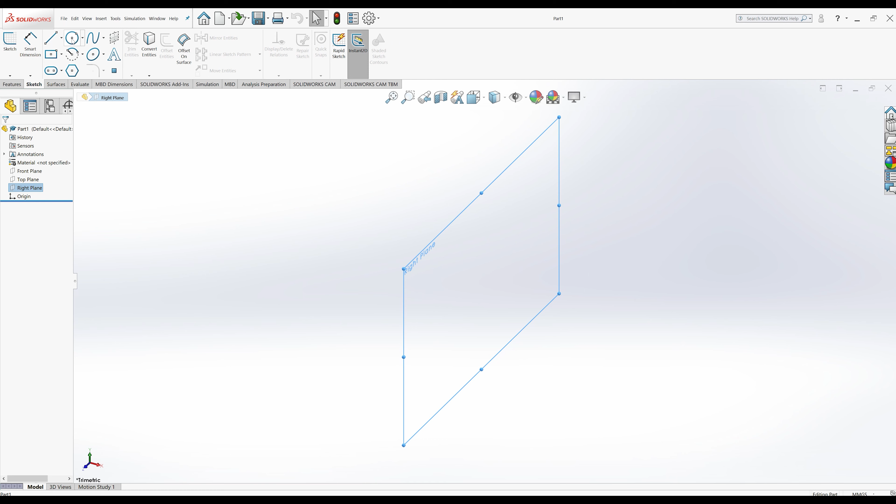You'll need to open up a new part and go to the right plane, and we're going to start sketching on that plane. We're going to start with the ellipse tool. To add the ellipse, we add it to the middle and then drag it out, click once and then click again to change the size of the ellipse. Then we use our smart dimension to add some dimensions to this.

We need to know the size of the shape. Just for illustration purposes, I'm going to make this 30, and then across I'll make that 106. It's nice to use round numbers if we can, and because we're just doing this as an illustration, we can do that.

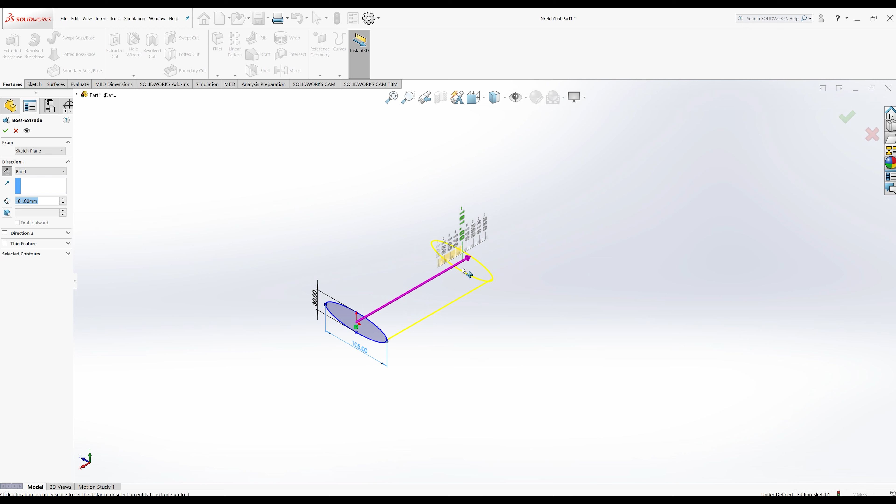Then we go to features and extruded boss. If you want to quickly change the views of how you're looking at something, you can press the space bar, which gives you lots of options on changing the camera angles. It's a nice quick way of doing it. So I've extruded that - it doesn't matter too much what size you extrude it to, but you just need to extrude it backwards. We can always change that later on.

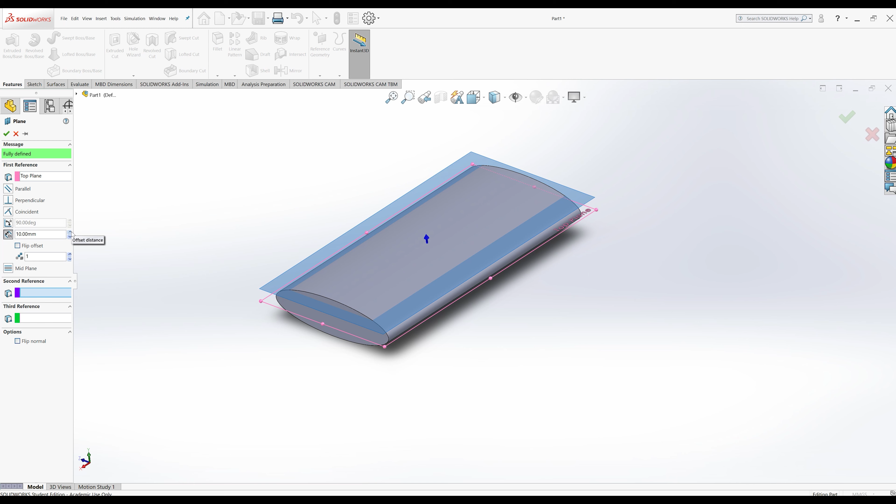Then we go to the top plane and reference geometry, and we're going to add a new plane above the surface, and we're going to use that to cut down into the remote to add the buttons.

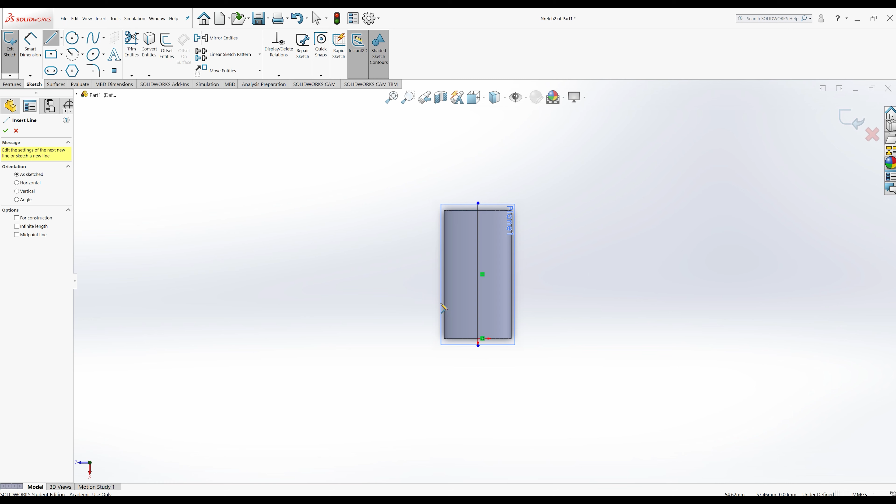Now what we'll do is add a few reference points. Those reference points are really useful because they allow us to add buttons in corresponding spots, and because we can use the dimension tool, it means we'll be able to add them in the right places that we're happy with. So I've got the center line, and then I've done another line about a quarter of the way across the remote, and then I draw a circle just in the middle of that - that's the kind of top navigation buttons you'd normally find on a smart remote.

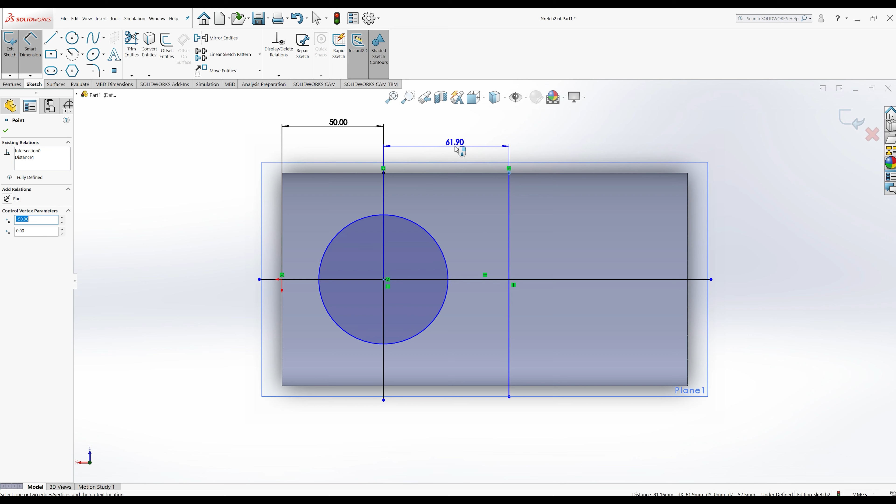Then another reference point a bit further down to add the next buttons. Then select the two points that we want the distance to be between, set that to 50, and then select another point and the centre of the circle so I can choose how far away they are. Do that about 70 to give a bit of space between the buttons.

Then I'm going to add a circle along that point, and because we've got a line down the middle, we can use that as our reference. If I pull that to the left, you can see I can choose how far away it is from that line.

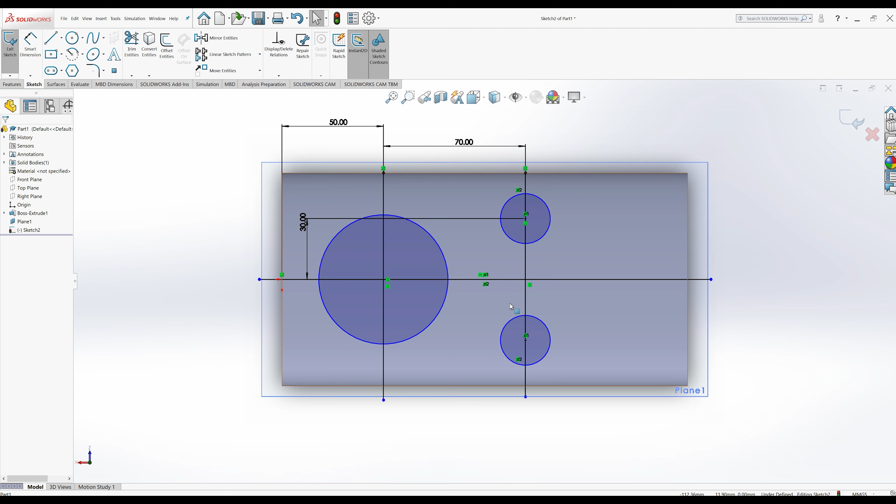Then what we can do is mirror - because we've got a center line, we select the circle and then select the center line, and it will mirror it for us so it's in the exact same position. It's nice and quick, much easier than redrawing it, so it's an efficient way of doing it.

Then we go to features, do the cut extrude, and select the contours around the edge. Once you select them, you don't want it to go all the way through the product, because then you'll just end up with a hole the way through.

You want it to go through so that it just goes onto the surface, not too far through there. As you can see with the yellow parts, you can see how far into the product they're going.

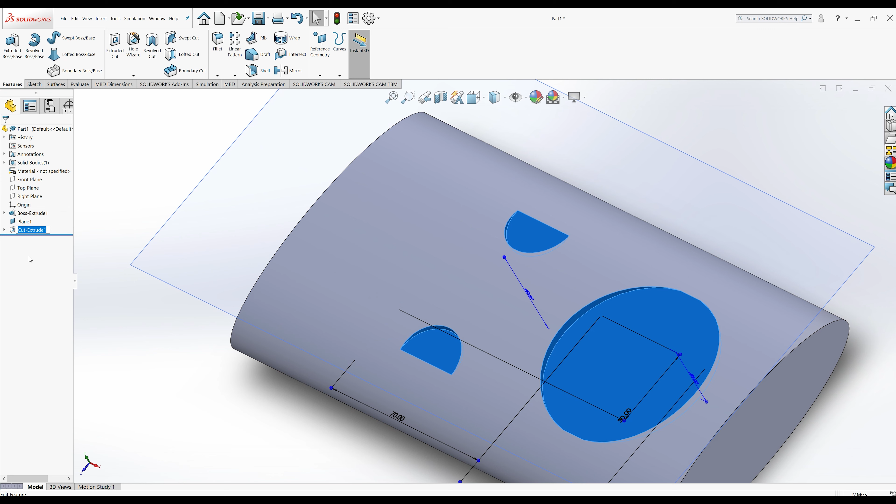When we green tick, you can see that the second remote buttons haven't gone all the way through, so we can just right click and do edit feature, and pull that down a little bit further. You want to make sure it cuts complete circles into the shape, otherwise it's going to make the next step a little bit more difficult.

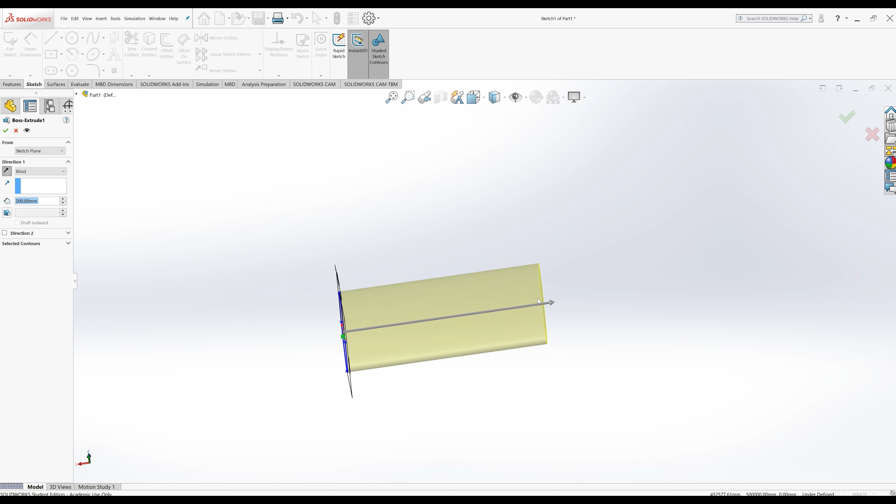And then we have the basic part there, and you can right click on that plane and hide it by clicking on the eye, which just hides it from view to make things easier. Then, not quite happy with the sizing of that extrude, so just make it a little bit bigger. Like I said, you can always change this as we go. Green tick just so we're happy with that.

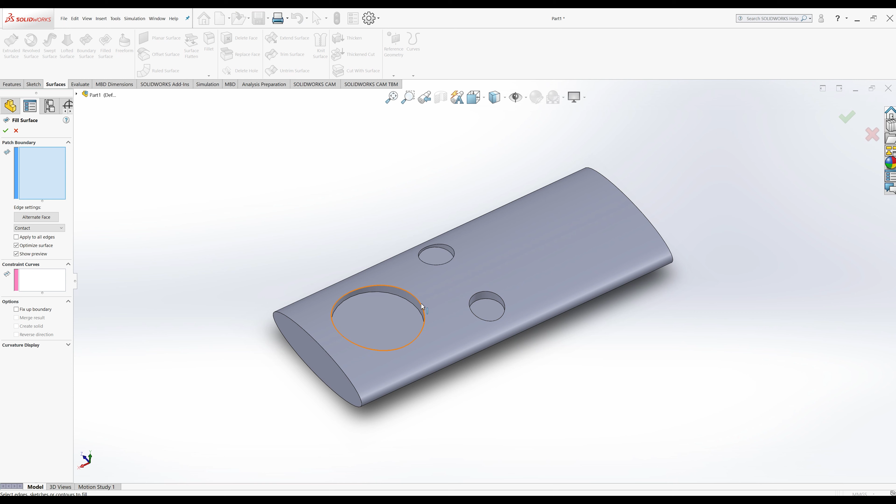The next thing we're going to do is use surfaces. If you haven't got surfaces on, right click on the tab and make sure surfaces are ticked. Then we want to go to filled surface. Filled surface basically fills a surface around a certain boundary. So if we select the circle, it takes a few seconds to load, and you can see it's got that yellow tinge, which shows where it's going to fill in the shape. It's a very quick, easy way to fill in these circles.

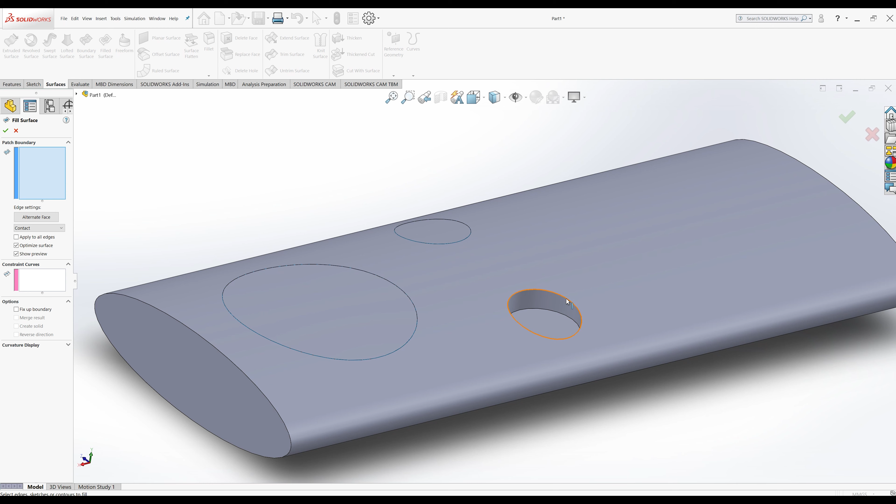So again, click the circle and then green tick. Now it's not a great idea to try and do more than one at a time, so what I'd recommend is doing one at a time. Otherwise it tries to fill the two surfaces together, so do one at a time and then green tick, and green tick again. So then we've got the next stage complete, and you can see it's filling in where those buttons are.

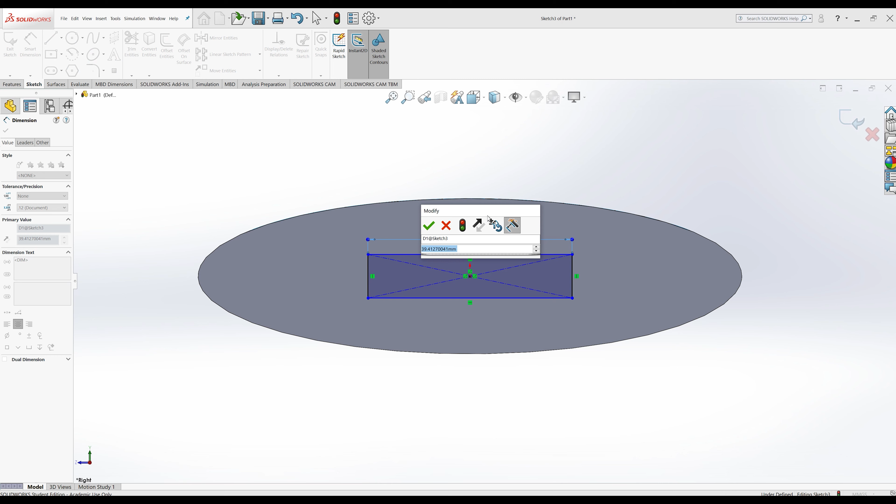Then just go to the front and sketch on the front. We're just going to add a rectangle shape. This is for the infrared reader that would normally interact with your devices, so we'll add that on there, and do the same again with an extrude cut. So just choosing the dimensions we want to use, then set that to 35 and 6 just for the height.

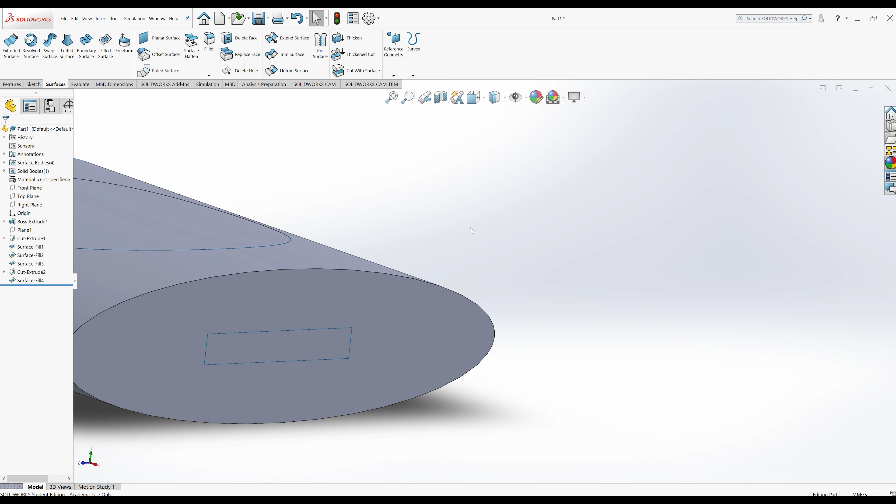Now again, like we did before, we can go into features and do the extrude cut, and change that to a very small amount, something like 1mm would be ideal. Then we can also go back to surfaces and do our filled surface. With this you'll need to select all the edges, not just one part, so go all the way around and select all the edges. Once you've done that, you see you get that yellowy tinge again to show it's being filled in.

Okay, so what we can do is we can now see that we've started getting those buttons in the right place, and we've got our infrared on the front. So far quite happy with the sizing of it all.

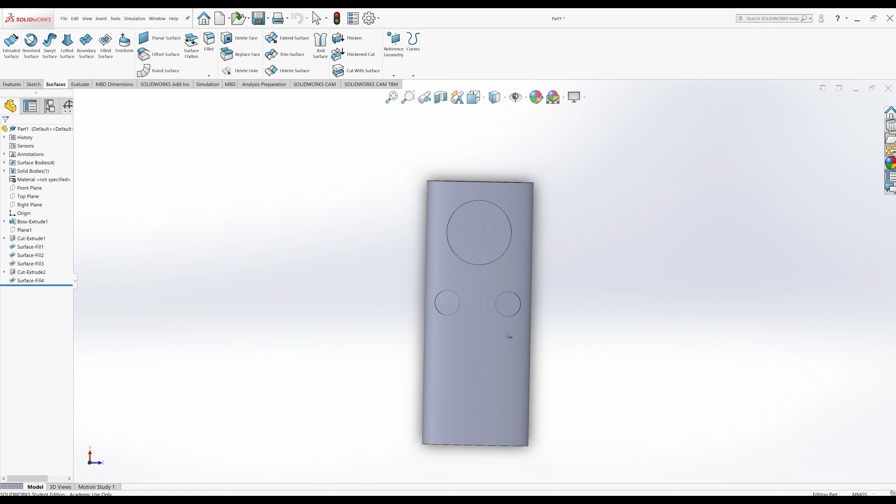So the next thing we need to do is look at making these thick, basically. So if we choose thicken and select the part we want to thicken, you can then choose whether you want it to thicken inside, outside, both, etc. And if you try to thicken it inside, you'll see an error comes up. So we need to actually change it so it thickens going outwards. It doesn't like to thicken inwards because it's just going to collide with itself.

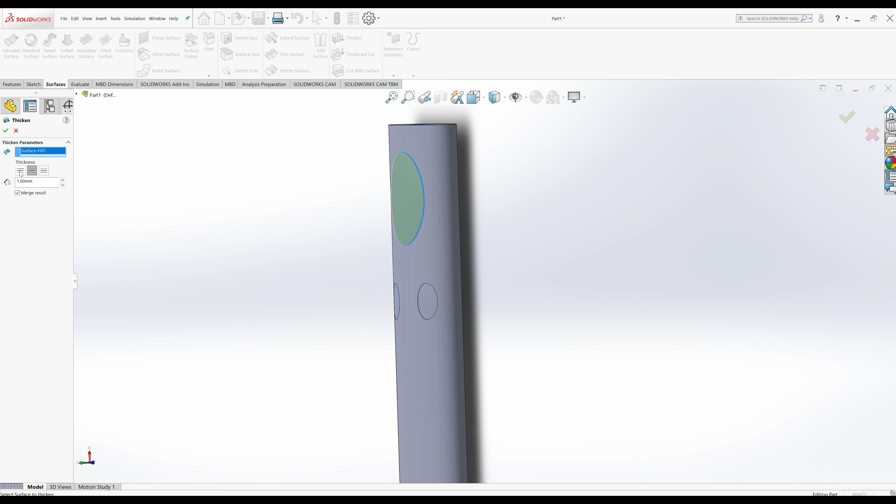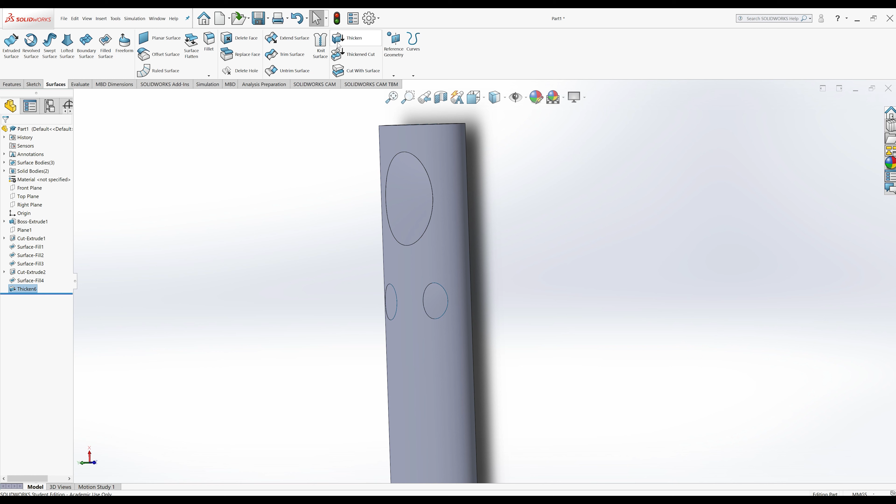So what we do is actually surface thicken, and you want to choose the far left option, and that will thicken it outwards. You'll see it gets raised ever so slightly, which gives it a more realistic look of a button anyway, which is exactly what we want. We can change that thicken to a smaller amount if we don't want to thicken quite that much, because 1mm looks quite a lot. So you can actually thicken it by 0.1, which still gives a slight raised surface but only a small amount, and then we can thicken the others as well.

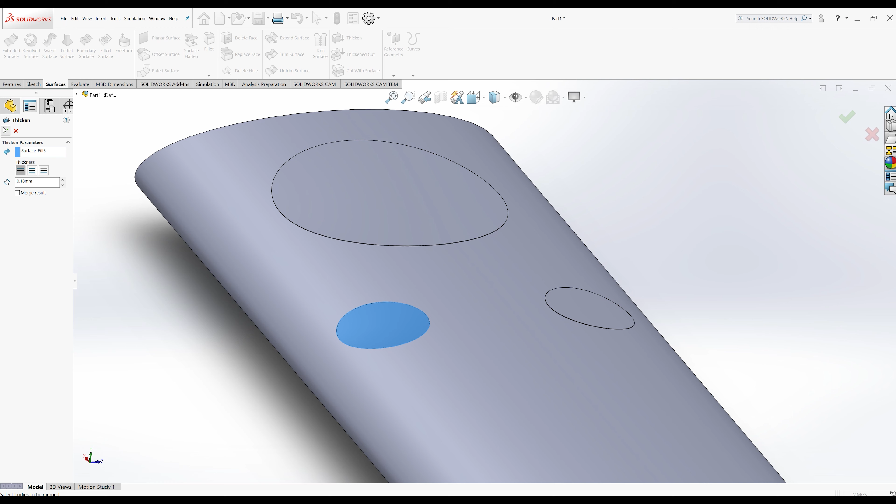Now with some of them, when you're thickening, you might get an error that comes up. Part of that is just the way it's trying to thicken it. So what we'll do is go back to our thicken, select the surface again, and then go into merge results and green tick. You can see that it won't merge the results, but it will still thicken it.

So the thicken still works and still gives us the same desired result.

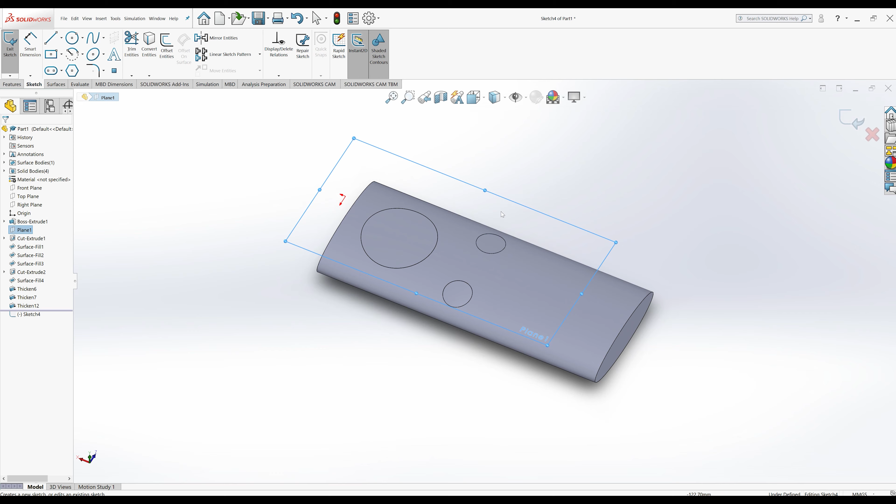Next we're going to have a look at the top view, and go back to that plane we had before, plane 1, and sketch on that one. That's the plane above our design, and this is the one we're going to start drawing on to add extra details.

We had a circle that's smaller than the original circle. Now we're going to extrude cut and fill these shapes again, so they need to be slightly smaller. Set this one to about 35, should be fine.

If we then sketch one of these lines out, you'll see these yellow lines appear, showing that it references it properly and keeps it in line. They normally lock to different angles, like 90 degrees is one of the angles it locks to. Now you can draw the lines like I'm showing here, but there's a much quicker way, and I'll show you that now.

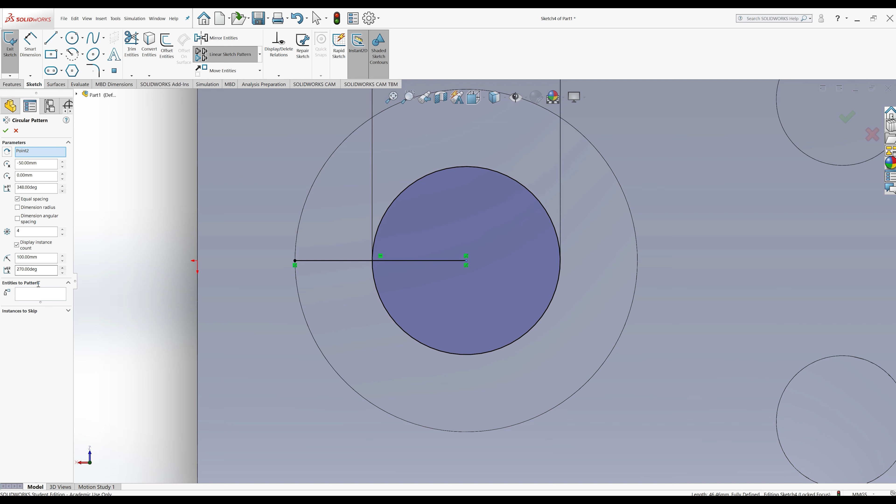The much quicker way is if you go to where it says linear sketch, drop down and do the circular one. Select the circle, go to the blue box, click in the middle, and that shows the point you want to rotate around. Set it to 4, show the pattern, click on what you want to pattern, and set it to 360. That shows you where the yellow lines are going to appear, so green tick, and you can see they've been replaced with black lines. It's quite a nice quick way of drawing those shapes out.

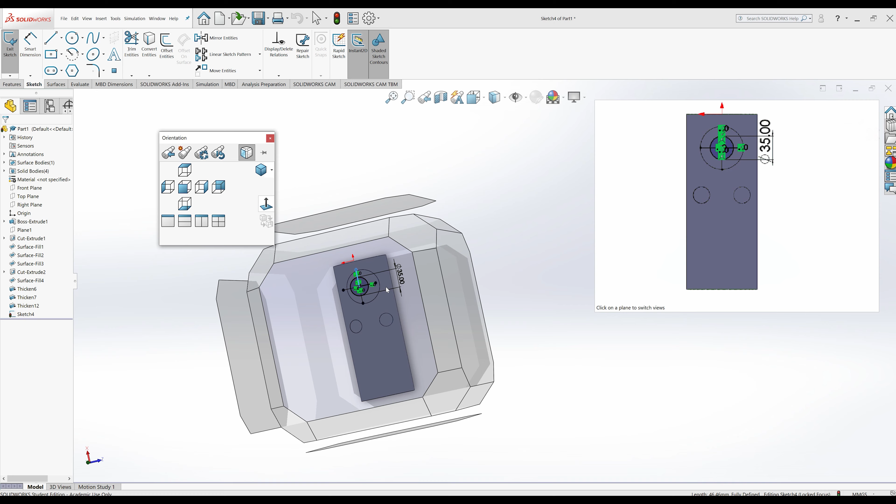We can use that to reference where we want the extra buttons to go. We're going to draw another circle on one of the black lines, and reference that by adding a dimension so we know how far away it is from the centre of the circle, so 25. Then go back to our circle pattern, circular sketch pattern, select the centre again, entities to pattern, select the circle, and green tick. You can see that again has put them all in the right place, corresponding to each other around the circle. It's a nice quick way of getting those shapes into position.

Now let's look at how we're going to add the next bits to these other buttons. We're going to add pause and play to the right button and menu to the left button.

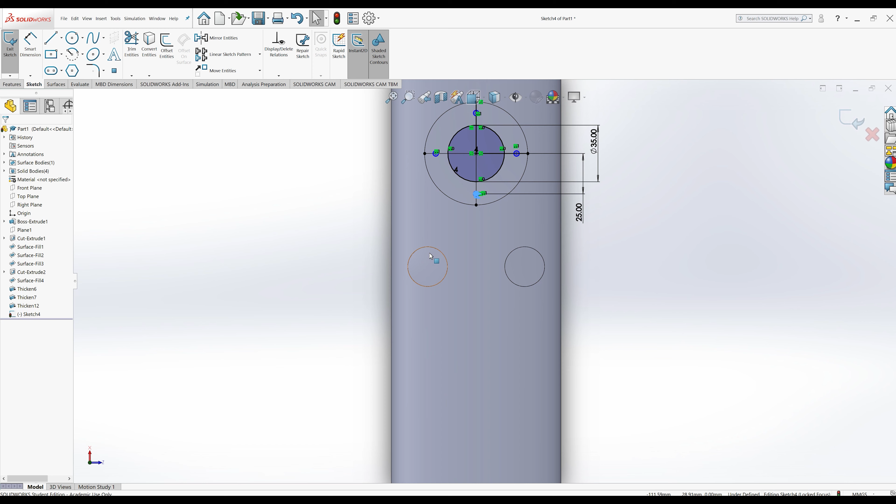So what you can do is add text - it's going to add text to your work, but it needs to follow a line of some kind. If we add a line, for example like I'm doing here, you can see that we can actually get the text to go along that line.

Now it's a good idea to make sure you're referencing everything, just to make sure you're putting it all in the right positions. If you don't put everything in the right positions, then your design won't look as nice, won't look as neat.

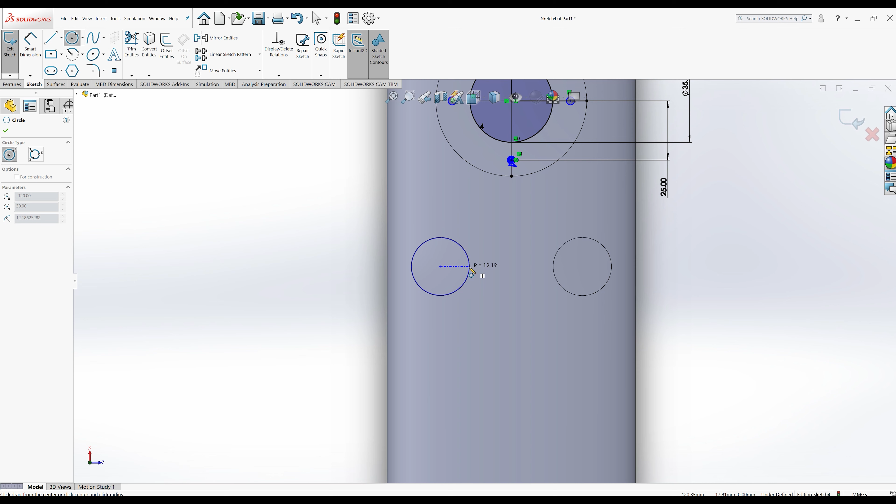So I'm going to add a reference point using the circle. If I go to the circle, it shows me the center point, and I draw a circle outwards - that's my reference point. You're kind of copying parts from what we've drawn earlier so we can control that, and set that to 25, which is the size we used for the circles.

I'm going to add a line across the middle as a nice reference point and hit escape to stop it drawing the next line. Then we can click on the A, which is the text tool. You can select the line, and when you enter your text, you'll see it appears following that line. Let's put that in the middle.

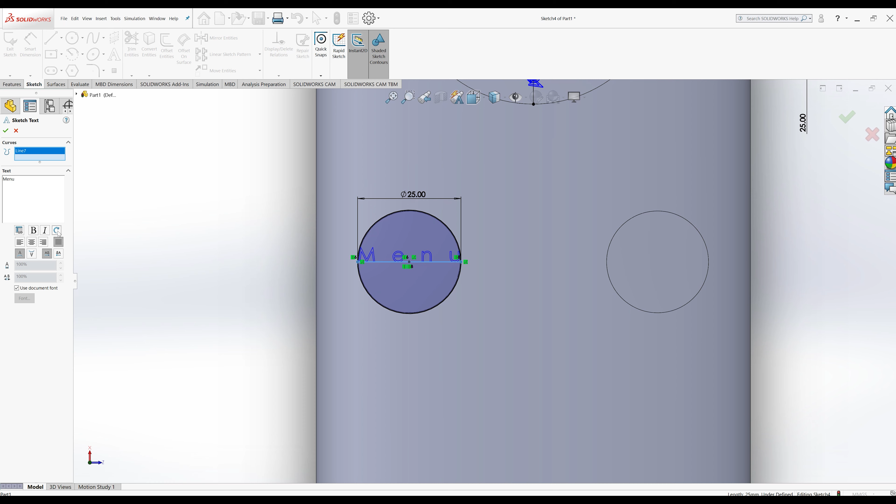You can also see that you can flip the text around, and you can also reverse it - there's lots of other options that I'm just demonstrating to show you how to do some of the different things. And then of course you can rotate it, etc. So there's lots of different options. And then green tick.

And then exit the sketch.

Now if we go to the right button, we're going to draw a circle around this one as a nice reference point again. I went to the edge of the circle to show me where the middle is, and then I can draw it out to the edge. We're trying to get these circles to the exact same size and in the same positions, and then using that reference point just to draw a line across.

Now to make sure that these buttons are going to look nice, we're going to actually mirror them. So if we draw the first one, just the top of the play button - that one's a little bit small, so I think I'll change that play button so it's going to be a little bit bigger. Just delete those two lines, make that one a little bit bigger. That's better. So again, that's just the top half of the lines, like so. Just click that one there.

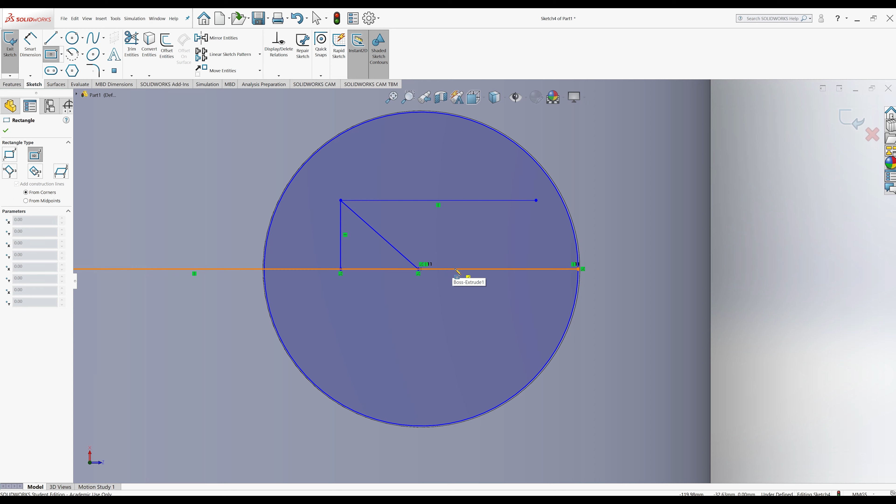And then what we'll do is add the other part, which is the pause option from the play buttons. So just choose the height of that one. I think I'll add a reference point just at the top there so that I know where the top of the shape is going to be, and that way I can make sure the rectangle meets that, just so they're in line with each other. And draw that one. Now once these are in position, we will be changing them with the dimensions tool, so just put them into place for now.

And then you can use the smart dimensions just to change the actual sizing of them. So we'll make that 2.

Now if that moves like that, just push Ctrl Z, and what you can do is right click and then fix different parts of your work, and that means that they won't move. So just right click and then click the anchor and it fixes them to place, which means that when I change the dimensions it has less areas to move, so you don't end up with it kind of jumping out the circle like mine did.

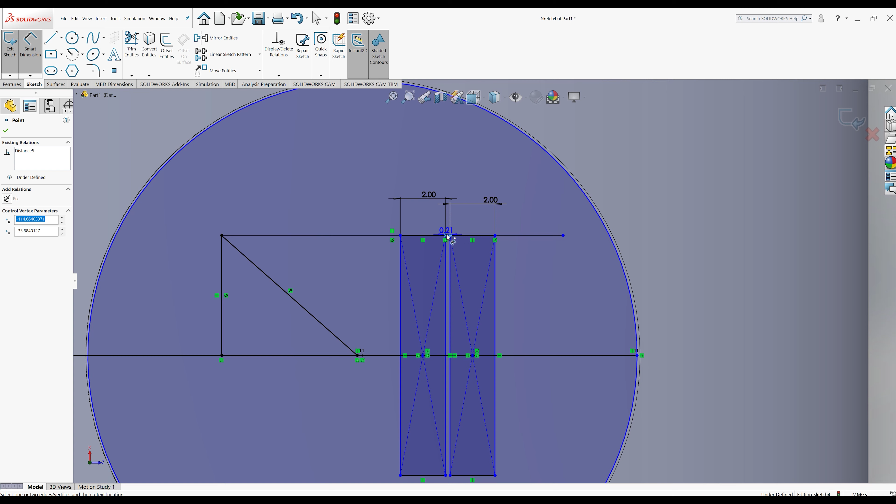And then make sure that the other one is 2 as well. And then I'll add a gap between the two parts just so we know how far apart they are, so 0.5 should be fine.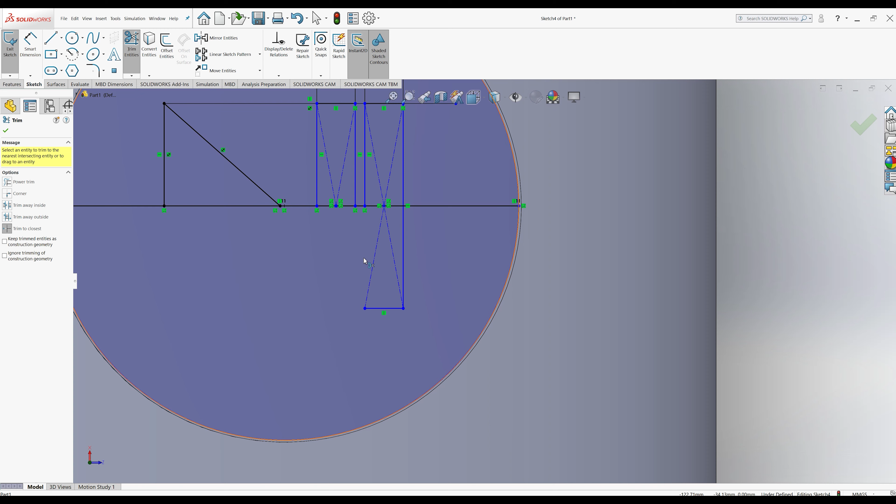And then what we can do, we can remove the bottom part of those lines. So what I'm doing is I've created them and then I'm deleting the bottom halves. You don't have to do it like this, but it's just nice to show you how to mirror the whole thing in one go. And if you go to mirror, entities to mirror, you want to select the shapes that you want to mirror first - so just clicking all the lines that we're going to mirror around.

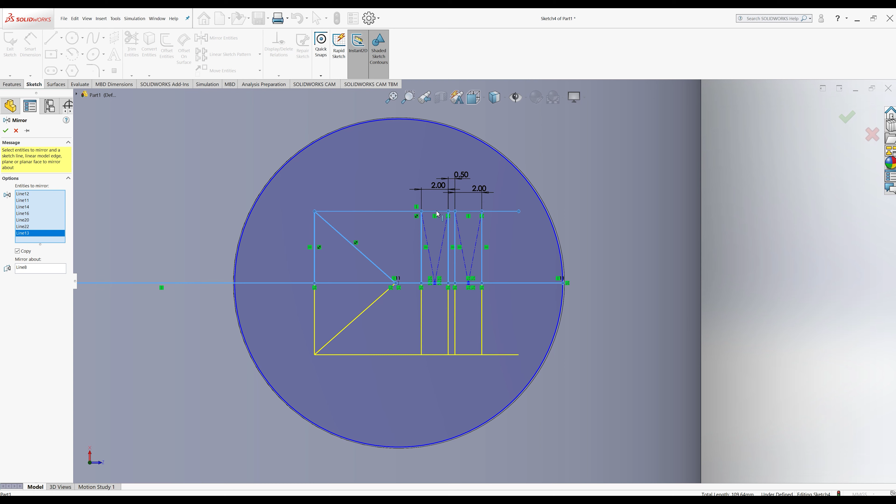And then mirror about, and choose the line you want to mirror. You can see the yellow lines to show where they're going to mirror, and then I'll just select that top line just for now to mirror.

And then we can use our trim entities tool and start trimming them. Just make sure it's set to trim to closest, and that way it will trim those lines just to the next point of another line that they intersect, and then you can see that it's gone blue, which means it knows that they are a separate part.

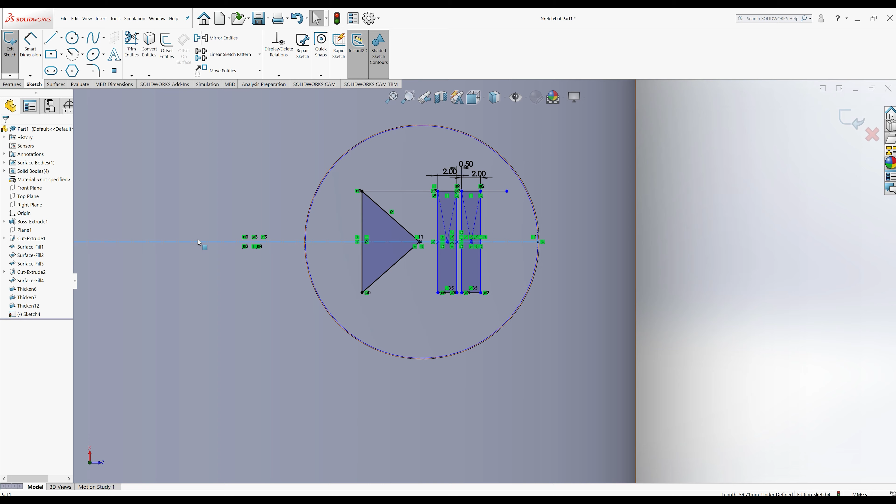Okay, and then what you can do is select the circle and then do for construction, and that way it knows that is a construction line, which means that when you try to extrude, it won't try to extrude cut those lines. It will only try to extrude the bits that are solid shapes and not construction lines. So it's quite useful to be able to do that.

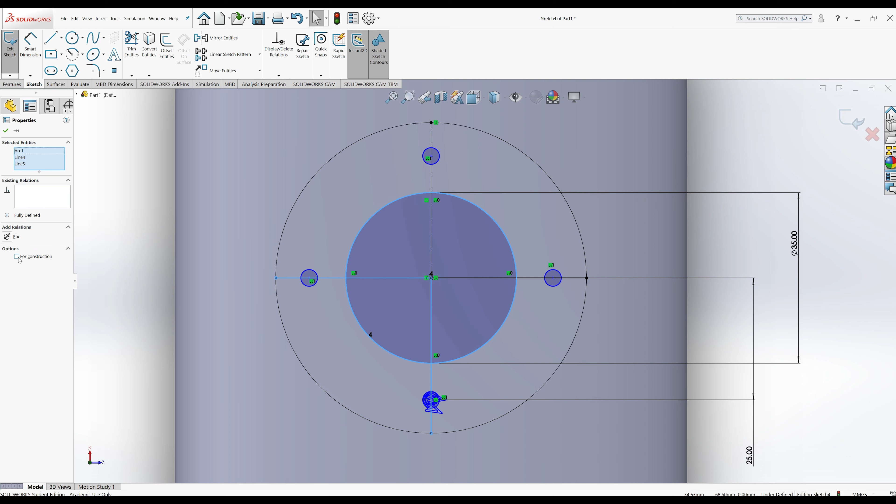And then just change some of these to construction as well, just because what we're going to do is we can then extrude this all as one part. You can of course do these as separate features and individual sketches, but just for this tutorial I'm doing it in one part. If you happen to accidentally make one a construction line, just click it again and untick the construction line box and it will stop being one. Then we get to features, and we can look at how we're going to cut that.

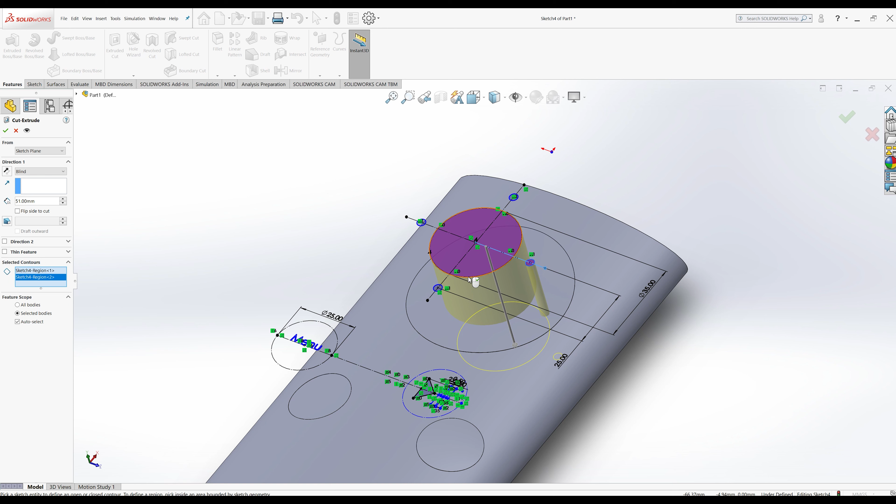So we'll exit the sketch, and then go to our extrude cut and select the parts you're going to cut. I'll change that one to construction line quickly as well. So extrude cut, select the circle, and then select the other smaller circles around it, because we want to cut them all out, and then we're going to use a surface fill just to fill them in.

I think I'll do the text after, so do that one for now. So you can see that it's cut through and given us those shapes.

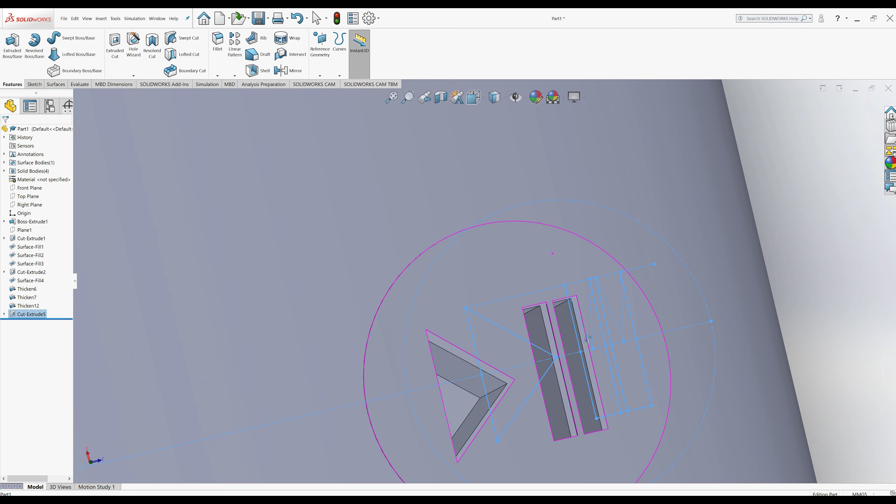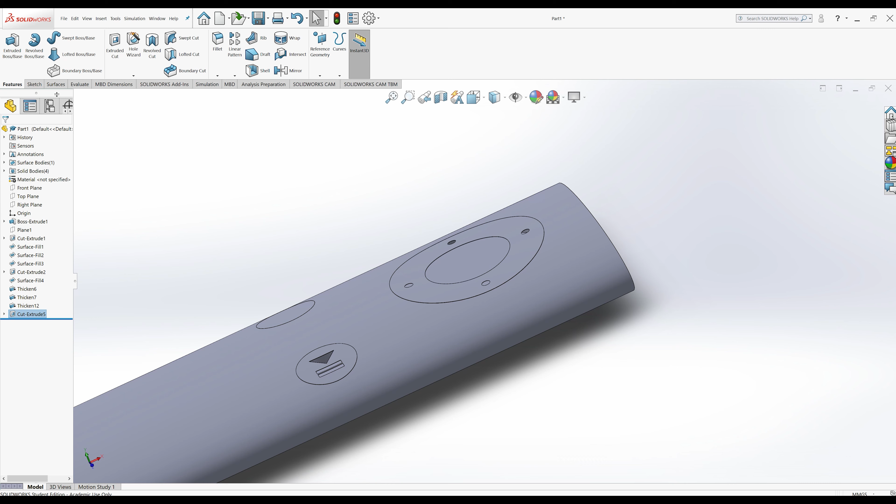Now it has gone quite far through, so what we can do is edit the feature and bring them up a bit more so they don't go quite as far through, because they only need to just touch the surface to give us that area to cut, since you obviously can't sketch onto curved surfaces. This is a way of getting those details onto surfaces that are curved.

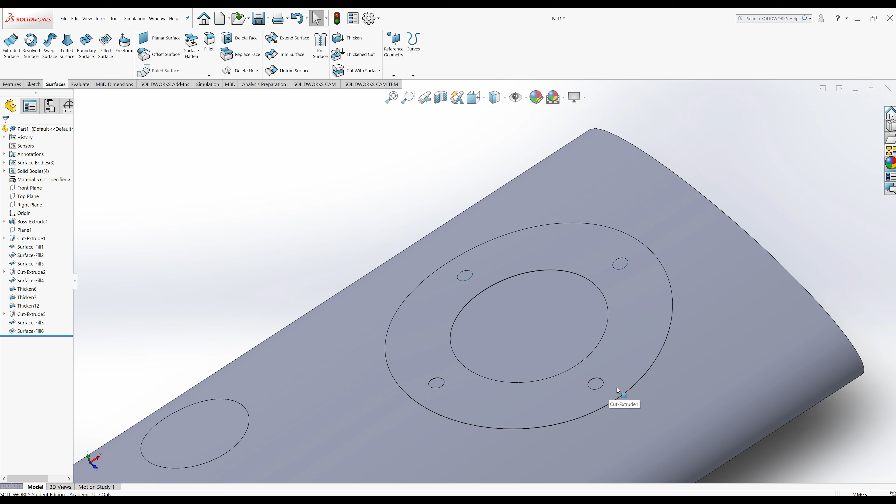And then filled surface, and we can work our way around and fill in all those boundaries that are currently empty. It's definitely a good idea to do these one bit at a time. It takes longer, but it means they will work properly. It's just better to do it the right way first time rather than continuously getting errors.

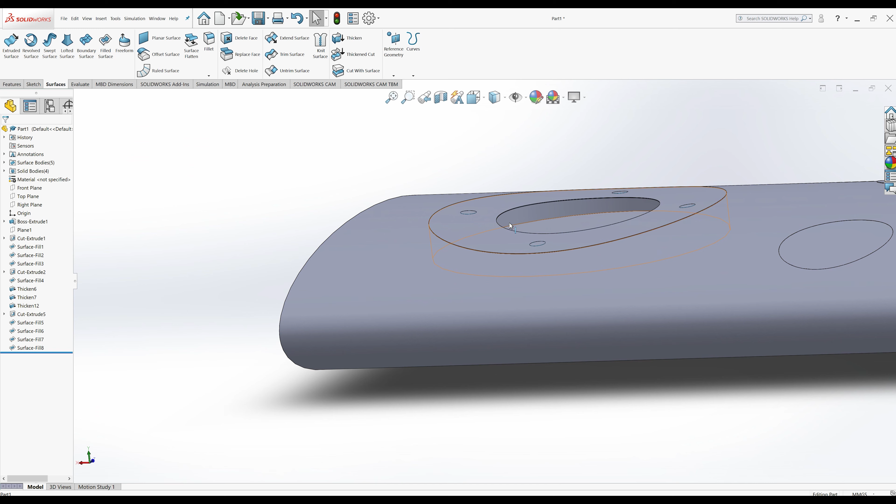Now just make sure that you fill in that circle in the middle as well, so again using your filled surface, you can fill that in.

And then we can go around the pause and play buttons. Now part of these, remember that you need to be able to select all of the outsides of these, don't just leave part of them because they won't fill properly. So you need to make sure that you select all the edges of the shape.

And again just fill in that one as well.

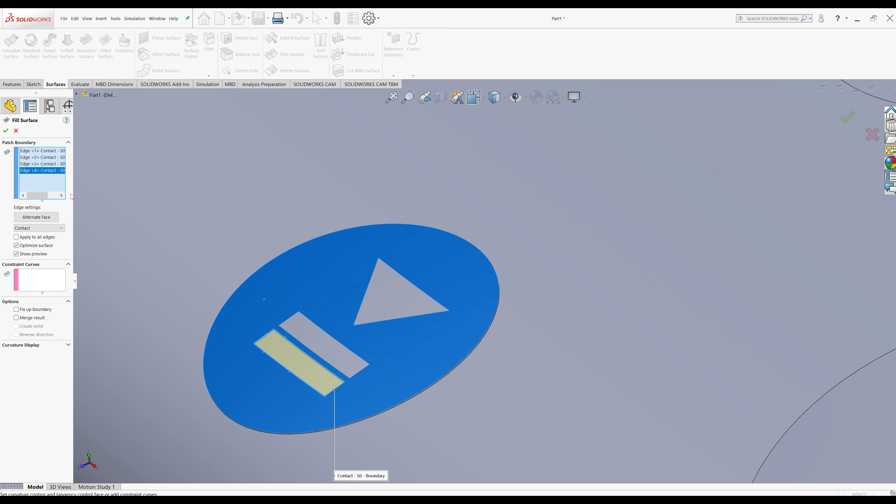Now that they're all filled, we can then start thickening. Again with the thicken, it's best to have it so it thickens outwards, and do one bit at a time. So just thicken one at a time.

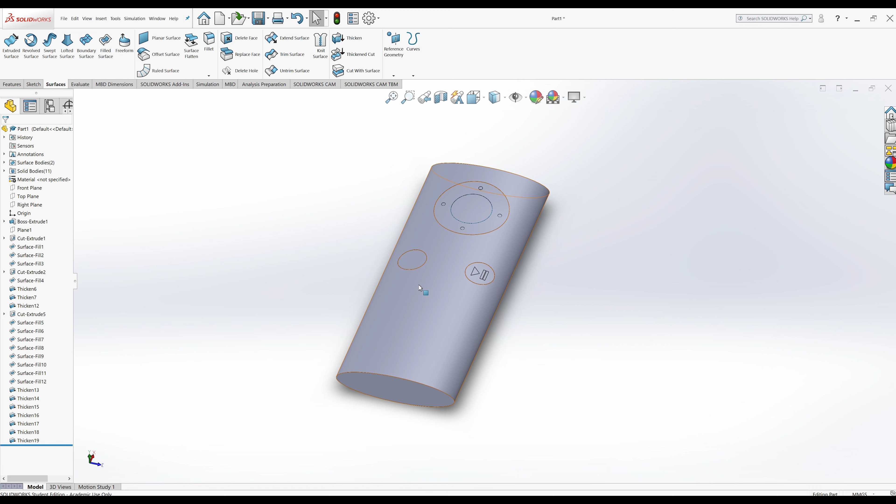Okay, so now that we've got them all thickened, we can then go to our plane. I think it will probably be best to do our text on a separate plane, so we'll do that as a separate cut.

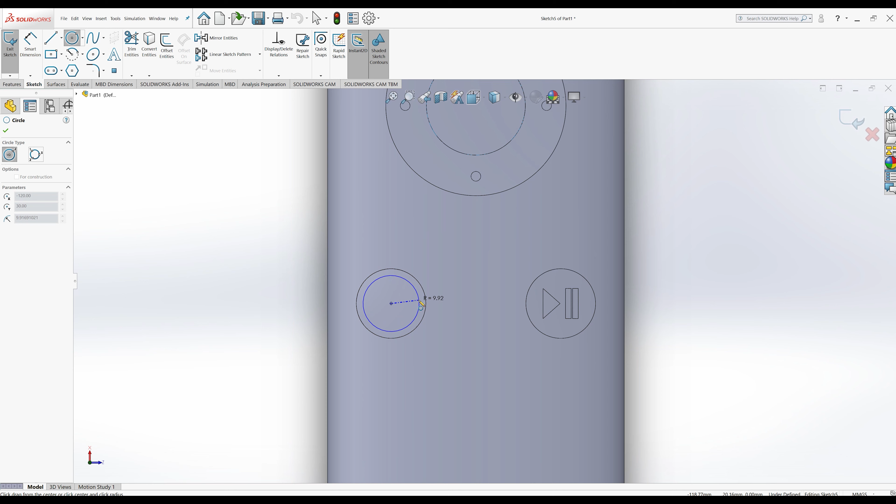So if we draw a circle from the middle, just do it to the outside of our circle, so it's the same size. We'll draw the line in the middle again.

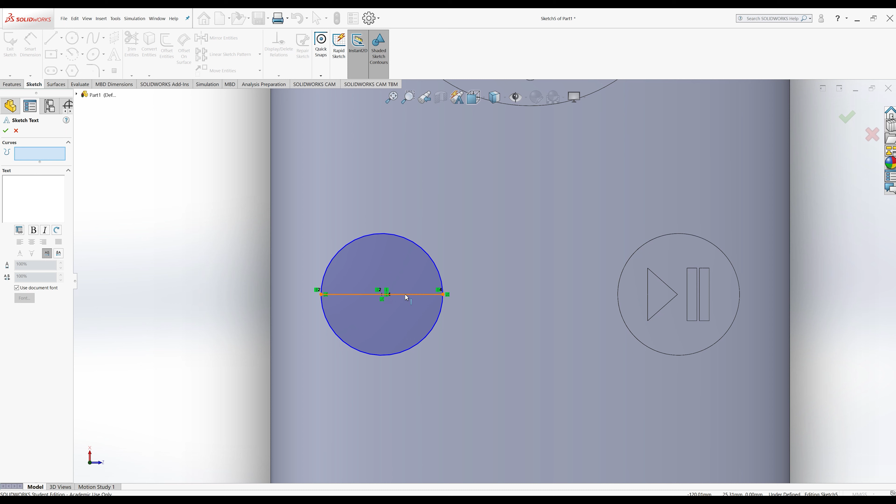And then do our text on there, so we'll add the text to the line, select the line and then type the text, so we'll do the menu button and then the green tick.

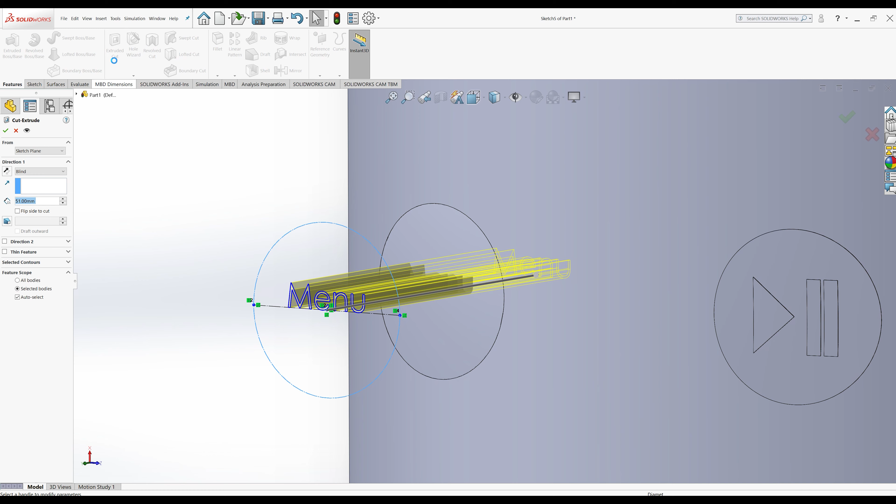And then we'll change those lines to just construction lines, so it's just the text that's left, and then if we go to extrude cut, we can cut the text.

Now again, we don't want that to go all the way through, we only want it to go part way through. So if we set it to where we're happy with, maybe just a little bit more, just to make sure it all goes through.

Now it will come up asking if you want selected bodies or all bodies. If you select one of the bodies, chances are when you push OK, you'll end up with what I get, which is where it's cut out everything apart from the centre of the E. So I've just deleted that and am going back to do it again.

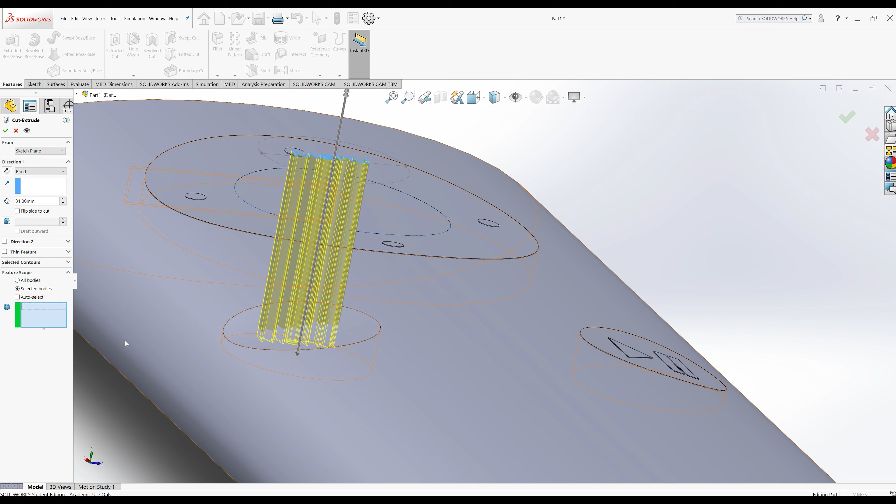So we'll do extrude cut, make it go through, and then when we push the green tick, we'll make sure that it's going to select that surface.

So we'll do all bodies this time. Push OK, and then you can see that it has cut all the way through there quite nicely.

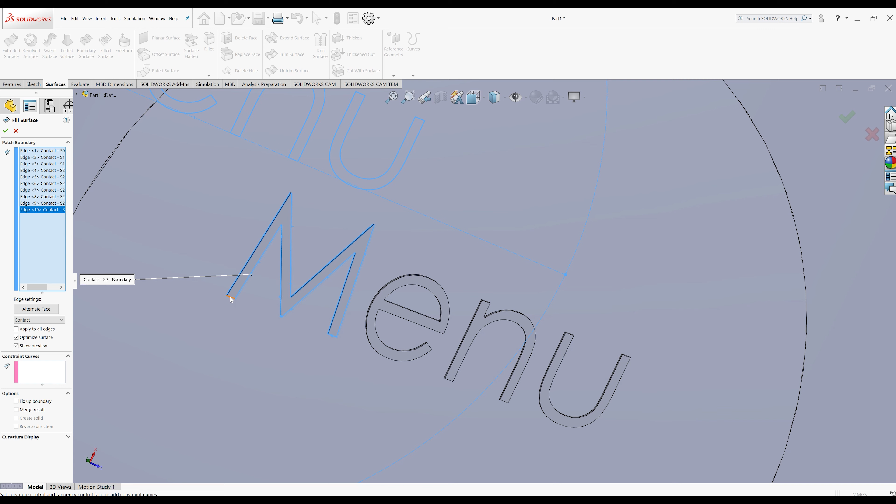Now the next thing we'll need to do is have a look at our surfaces and start doing our filled surfaces again. So if we go to filled surface, you'll need to select all of the edges, being careful that you select all of them. Some of the tops of the M's, for example, will have some flat edges, and I'll zoom in to show you them in a second, just to make sure we select all of them. You know you haven't got the full surface selected when you don't get that yellowy outline.

So you can see it won't do it unless it's all filled. There's the top bit, and the top of the right one as well. Once they're selected, you can see it gets that yellow, which means it will fill that in.

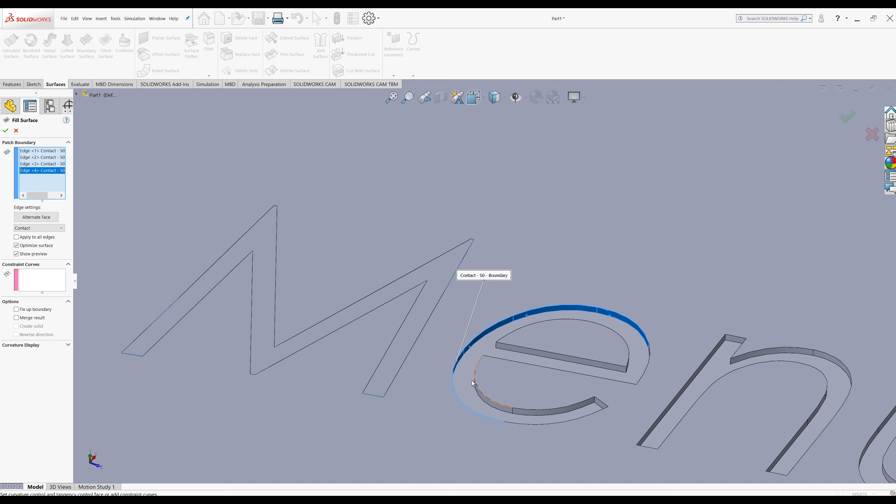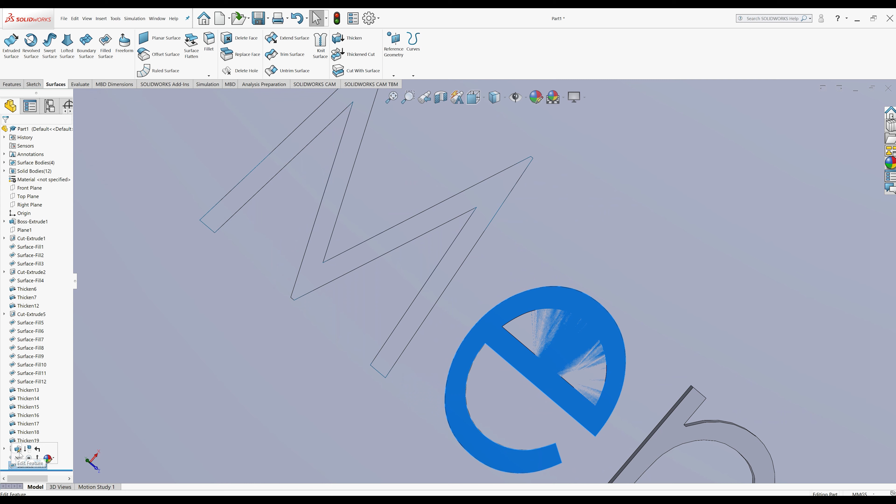Now when you go around the letter E, you need to be careful that you select the whole of the E, because when you've gone part way round, it will let you fill it in, but it will ignore the island part of the E. So if I show you that - can you see it's kind of ignoring that island bit, and you get this funny texture look. So what I'll do is undo that and delete that surface, go to the surface, and add those outside bits, and then green tick. That means it now includes the island, which gives it a much better look.

And then again for the N, just select the whole of the N.

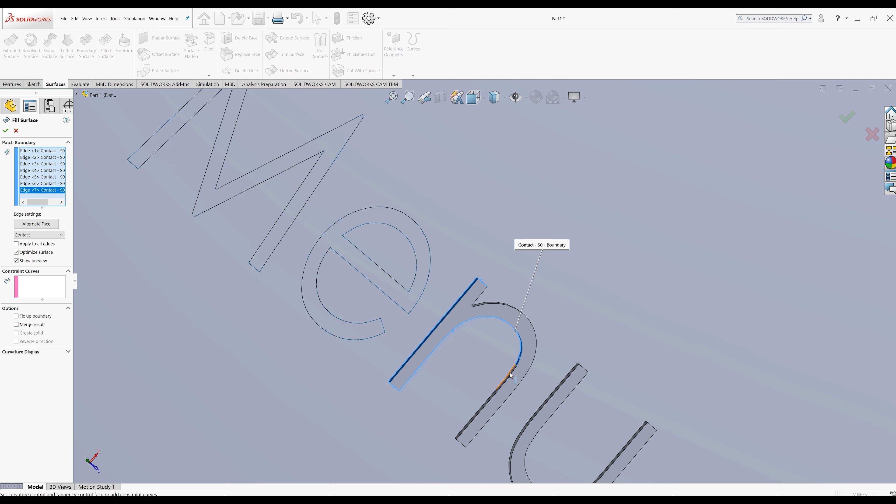Now I can imagine you guys get the idea of that now. Okay, so I filled in all those shapes and skipped ahead a little bit, just so you don't have to watch me filling in all those letters.

And then we can go to our SolidWorks add-ins and add PhotoView 360. If we go to the right side and click on the blue, red, green and yellow orb, you can then select appearances. Now we want to add different textures, and this is partly why we needed to cut out those buttons, so that we can select them as different parts.

So you can just click and drag them onto the surface that you want them to go onto. You need to do this a little bit slower, because if you rush off before selecting the actual part, it won't actually connect to it properly.

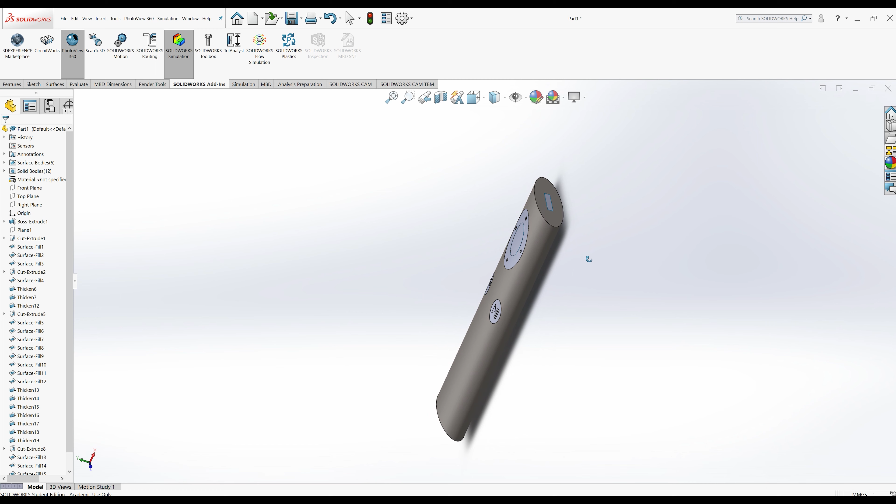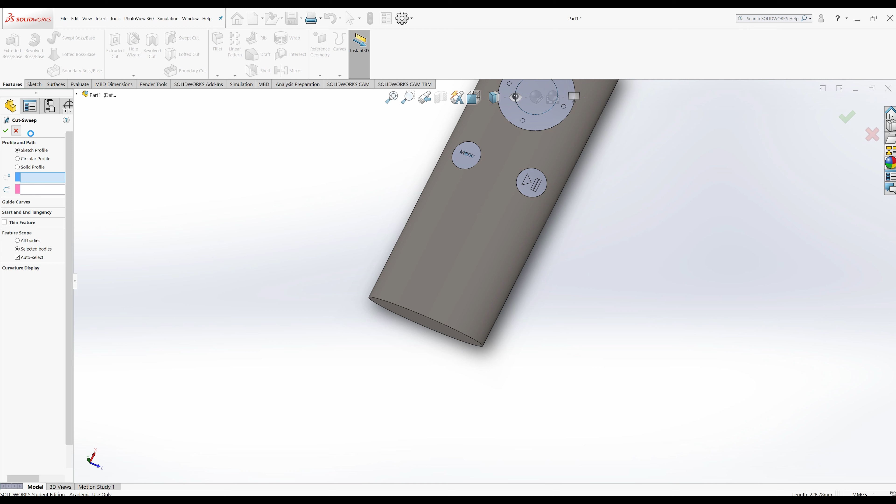So let's fillet these as well, just to give them that nice round edge. Notice that, so change that to 2, just to give it a very small fillet there, to curve it a little bit. And then I'll set this one to 2 as well.

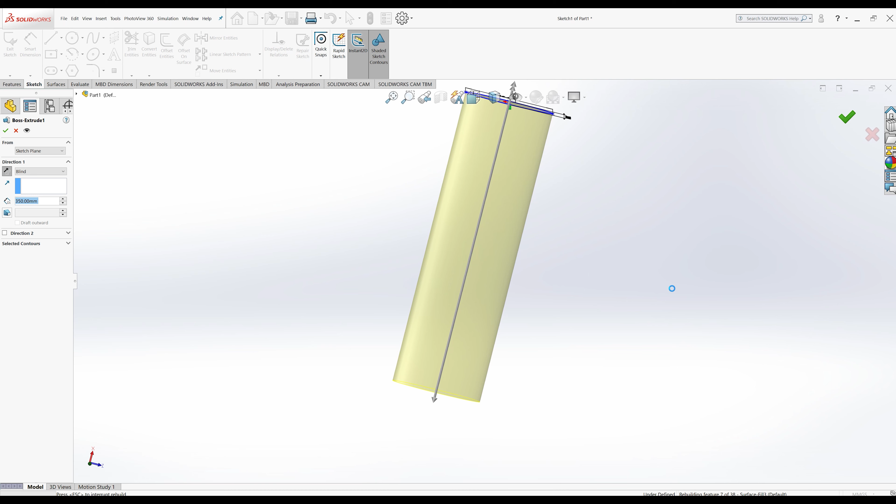Right, let's have a look. So quite happy with those textures on there. I'm going to make this a little bit longer just to see what that looks like. Yeah, a little bit better. It just gives it a bit more of a similar look to a smart remote.

And then we can go along and add those textures. If we then add different colours, it doesn't really matter too much how you want this to look. This is kind of where you can go a little bit individual, see what you want to add to it. Just add that to the thicken.

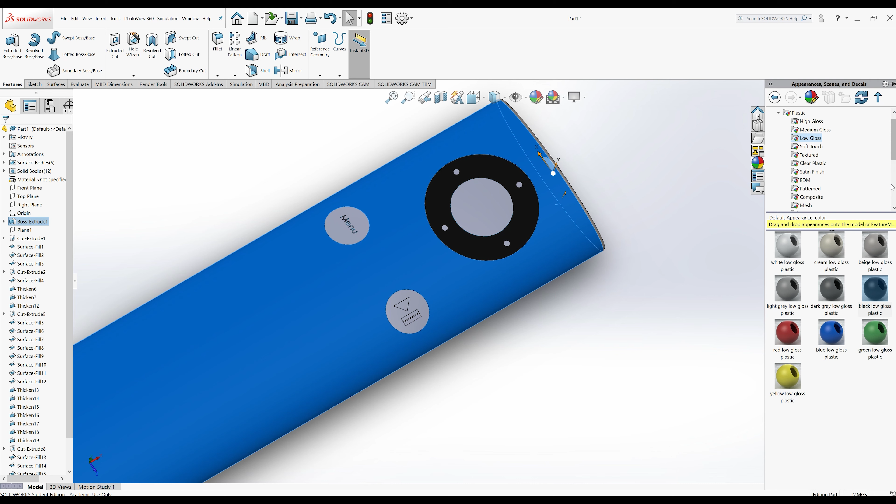And then if you go into the appearances, you can actually see what appearances are there, and you can push the red cross if you wanted to remove an appearance. Then drag that on there. If you hover over the one that you think corresponds to the right one, so if you just want to do that face area, then you can do that. And then I'll add a slightly different one to the buttons.

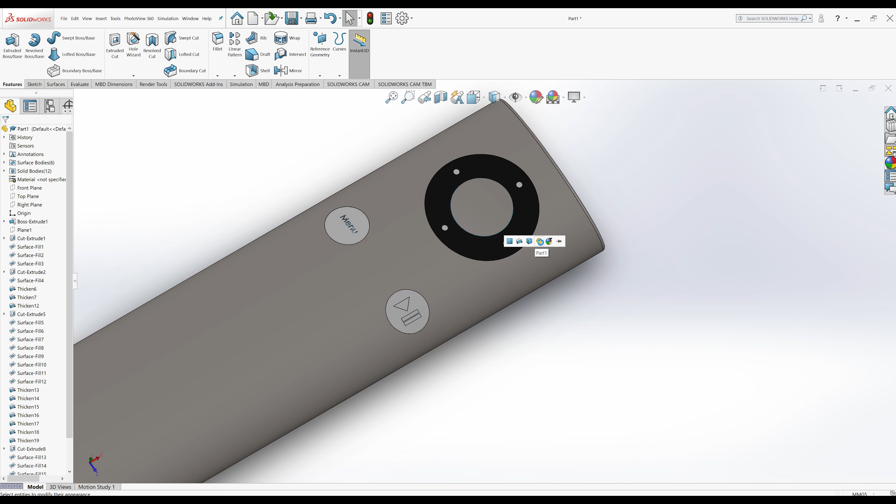Let's do that to the face. And then drag this one, add that on the face as well, add that on the face.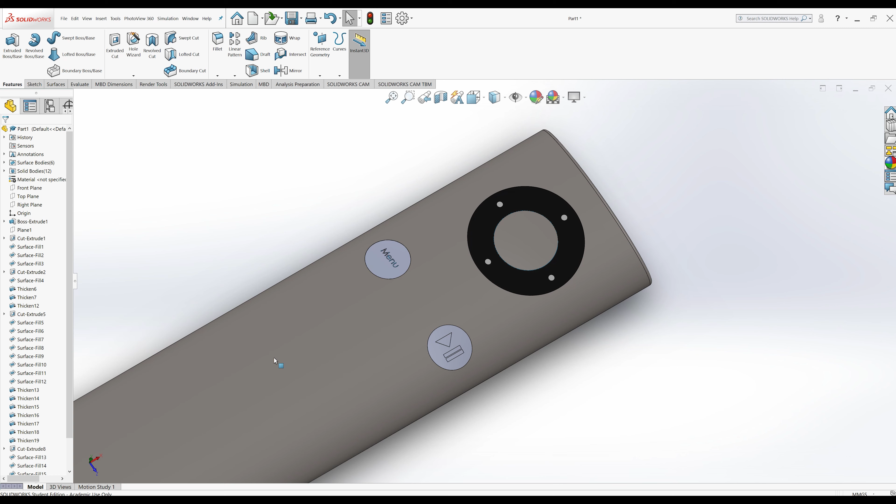And then if we add a little bit more detail to the rest of our part, so we've got the menu and then we've got the pause play buttons, so let's add a bit of texture to them.

Again, we just want to do it to the face, just showing you the different options. And then that one as well. And then we've got the menu.

And if you do it to the part, you'd see that the entire part would become that colour, which we don't want.

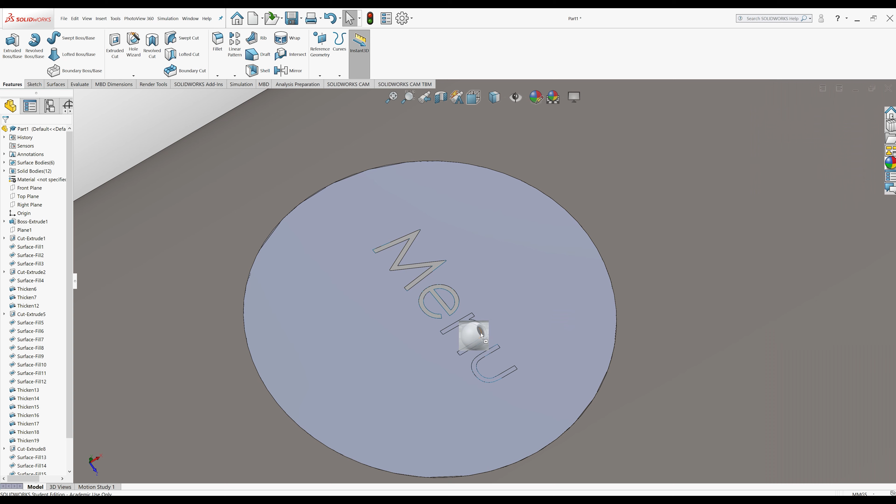And then put that there, drag that on there. Just try to do all these the same kind of colour, just so that they look quite nice all together. Gives it a nice finish.

And then I might add a slightly different gloss to it, just to make it look a little bit different, make them stand out a bit more.

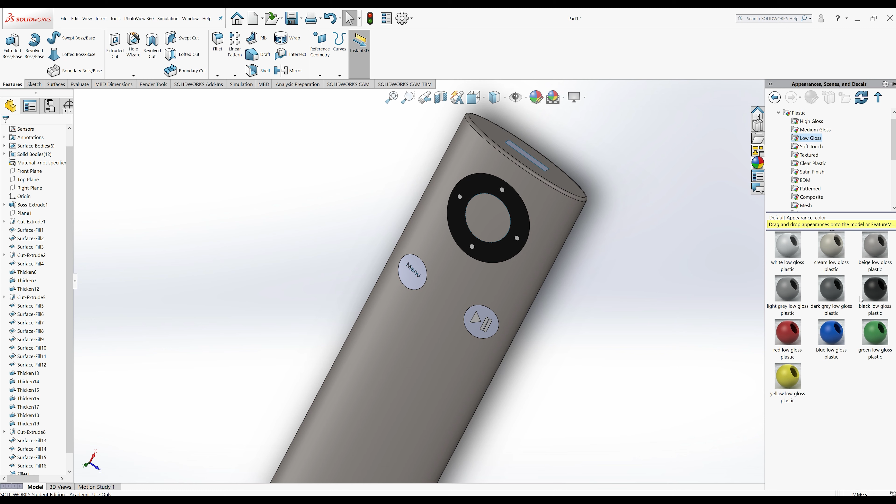So just remove that one. You can copy the appearances as well, so if you right click on them you can do copy, and then you can paste the appearance and then choose where to paste it, which is a little bit quicker than the dragging and dropping.

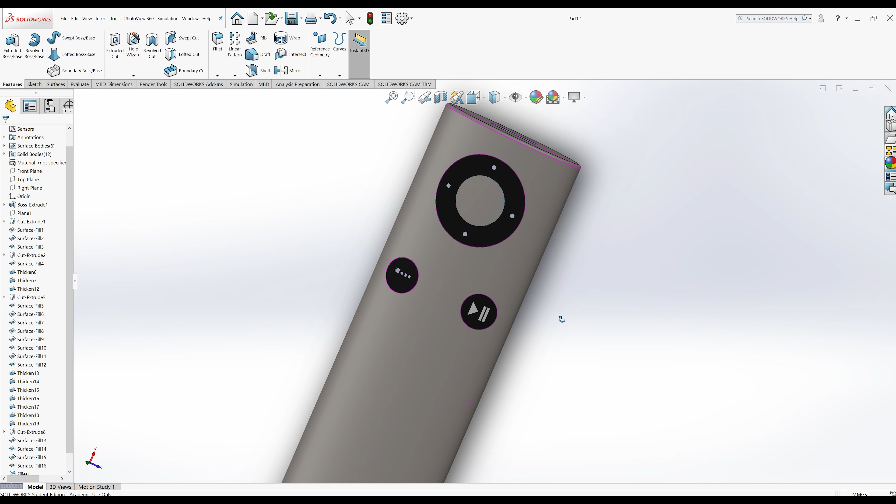So if you're using the same sort of parts for each of them, don't forget that bit in the E as well, because that comes up as its own separate area.

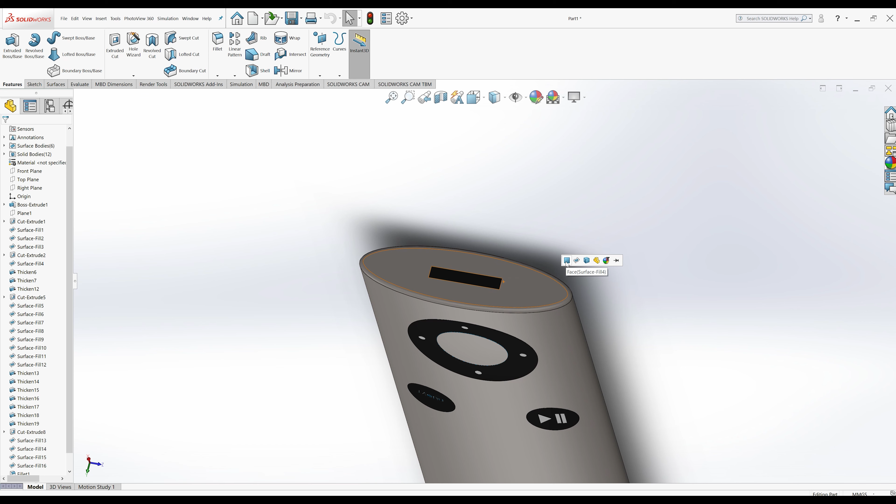And then once we're happy, we can start putting into position and then deciding on how we're actually going to render this. And don't forget the infrared as well at the end of the remote.

Okay, so if we go to render tools, if you go to options, I tend to actually change the final render to good, and then just green tick after that once I've got it into a position I'm happy with.

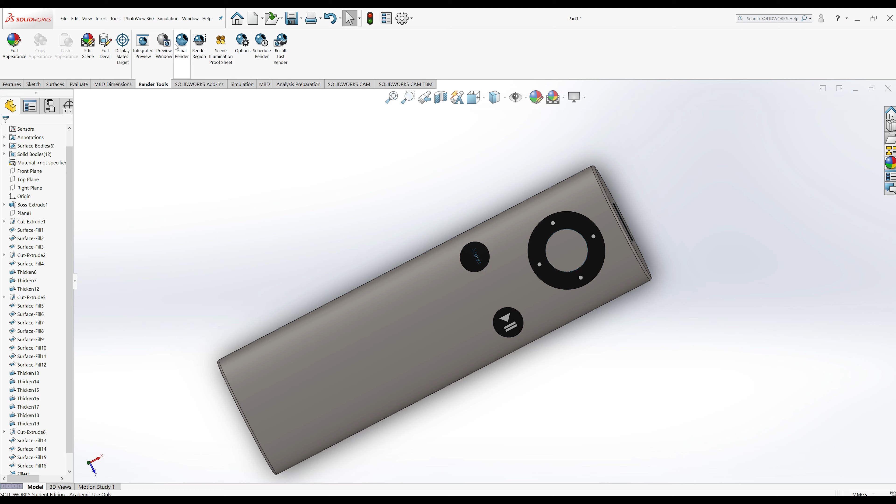And then it would load up, same as we've done with our other projects that we've looked at. You can then start rendering it. Now rather than me just talking over the render, I'm going to skip through the render a little bit, and then we can kind of see what the final result looks like once it's finished rendering.

Okay, so that renders nice and quick. And then we can have a look at moving the angles a little bit.

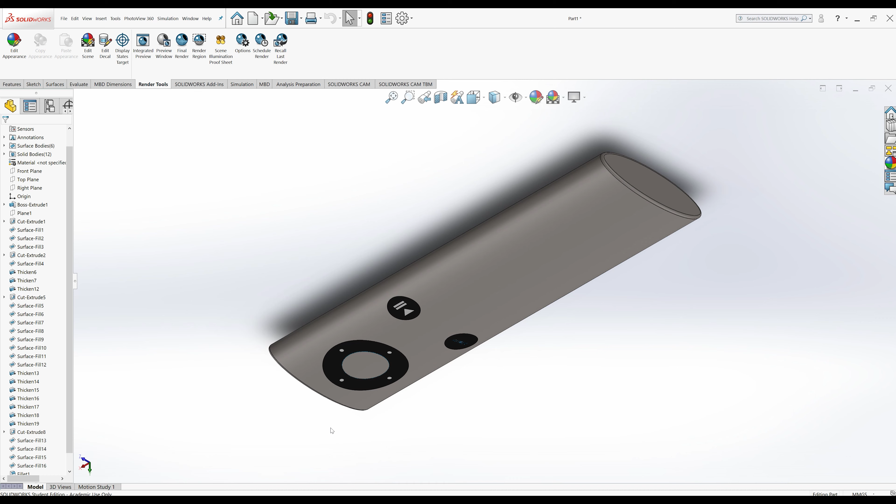Once you get into a position that you're happy with and you're happy with the colours, that's when you can do your final render on the top quality, because that's what takes longer and that's what takes most of the time.

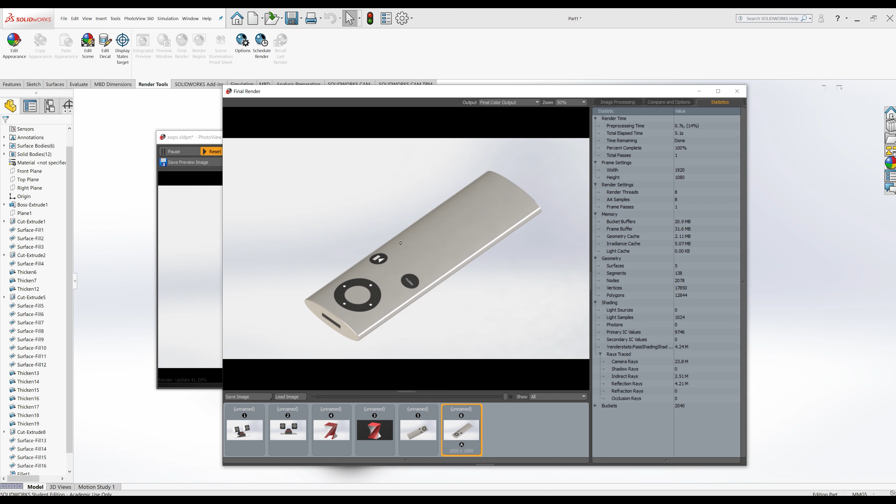So just keep testing it in different positions and just seeing if you're happy with how it's looking. And then again, because this is a short, it's the lower quality one, you can kind of get an idea of what it looks like, but it's not going to be final render quality.

And that's when you go to your options. Don't need to change the preview render, we'll change the final render quality to maximum. And then this is where it takes a bit longer, so allow yourself plenty of time for this, and then do final render.

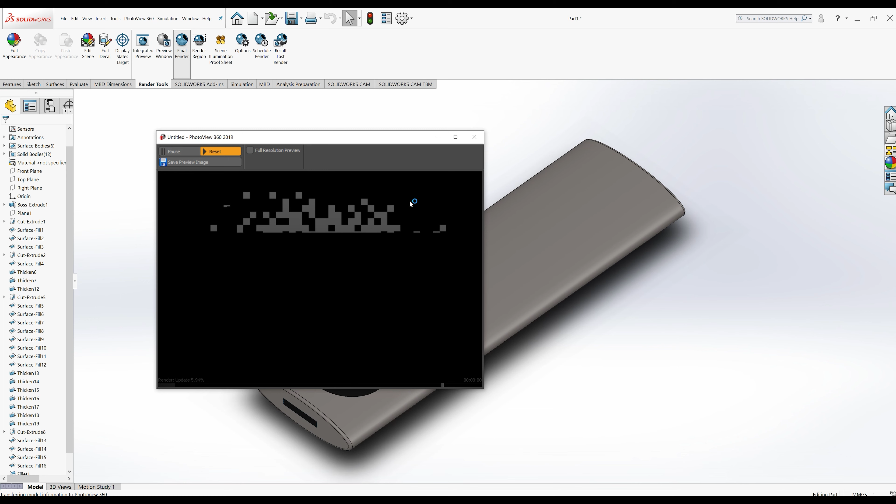Okay, so I've just skipped ahead a little bit there just to show you what the final render looks like, and then when you zoom in you should see that it's got a little bit more detail to it, and you can of course add more texture to this, you can change it, you can do your own things now.

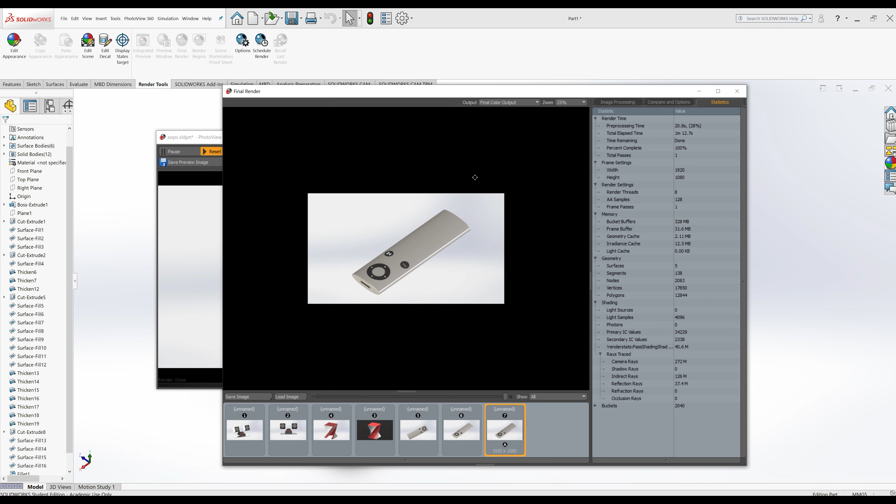So this is where you can look at, actually, do you need to have more gloss, do you need to have less gloss on there, and then that's when you can try it in a final render and then save those pictures when you're happy with them.